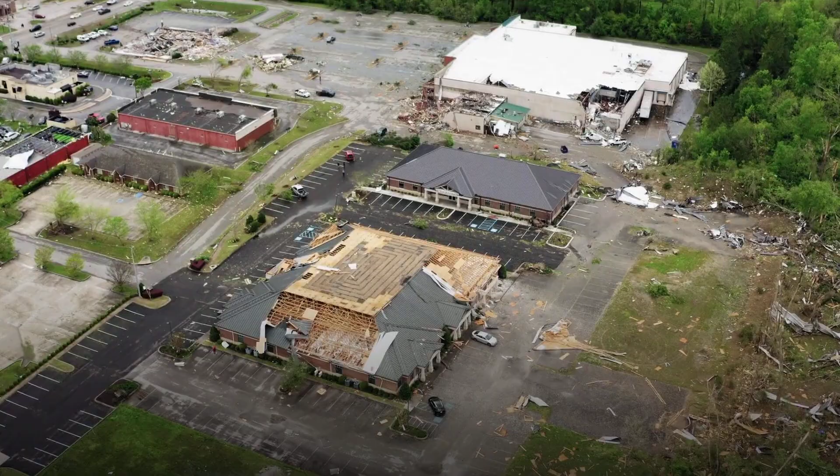A piercing crack, then a thunderous roar, ripped through the atrium. The fourth-floor walkway, suspended high above the lobby, shuddered. In a horrifying cascade, it tore free from its supports, plummeting onto the second-floor walkway below. For a moment, the world seemed to hold its breath, before the combined weight of both structures, laden with dozens of people, crashed to the concrete floor.

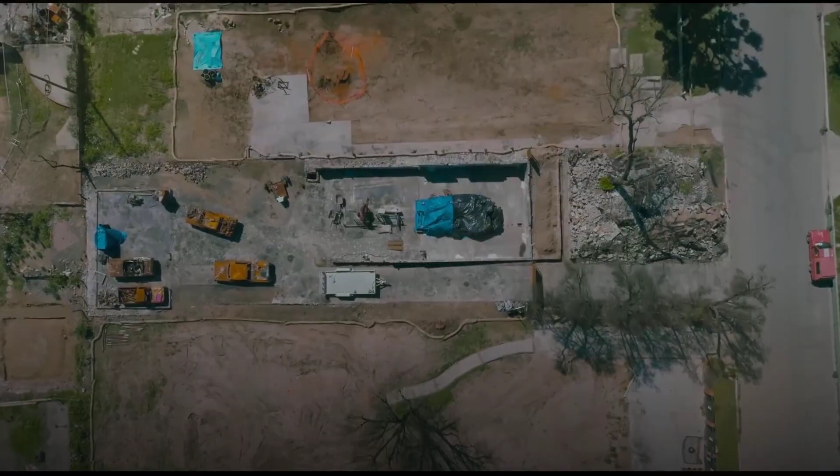The joyous sounds of the evening were instantly replaced by screams, dust, and the chilling silence of utter devastation. The immediate aftermath was a scene of unimaginable chaos and heroism. First responders, hotel staff, and even guests scrambled through the wreckage, searching for survivors amidst twisted steel, shattered glass, and broken concrete. The scale of the tragedy quickly became apparent.

What began as an evening of innocent revelry had transformed into a mass casualty event, etched forever into the city's memory. This was not merely an accident, it was a structural failure of profound magnitude, questioning the very foundations of modern engineering and design. By the time the dust settled and the rescue operations concluded, the true horror of the collapse was undeniable.

114 people had lost their lives, and over 200 were injured, many permanently. It remains one of the deadliest structural failures in American history, a stark reminder of the immense responsibility borne by engineers, architects, and builders. This wasn't a natural disaster, it was a catastrophe born from human design, a flaw that would unravel under intense scrutiny, exposing systemic issues in the engineering profession.

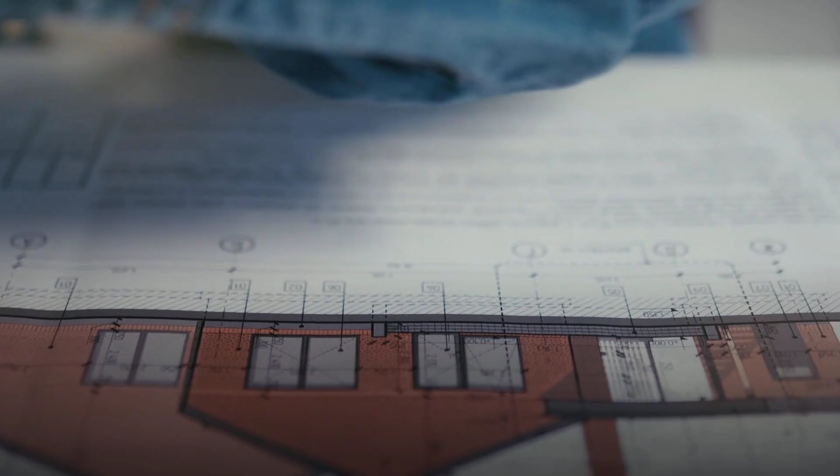How could such a catastrophe occur in a modern, seemingly robust structure? The question haunted a nation. For engineers and the public alike, understanding the why became paramount. The investigation would reveal not a dramatic structural collapse in the traditional sense, but a subtle yet catastrophic design modification, a change that seemed minor on paper, yet fundamentally altered the load paths and stress distribution within the walkway's suspension system. This was the smoking gun, a seemingly innocuous alteration that sealed the fate of over 100 innocent lives.

To understand the failure, we must first appreciate the original vision for the Hyatt Regency Kansas City. Completed in 1980, its signature feature was a vast, multi-story atrium, an architectural statement designed to impress. Spanning the atrium were 3 suspended walkways, connecting different wings of the hotel. These elegant structures were intended to be a dynamic part of the guest experience, offering panoramic views of the bustling space below. Their design was integral to the hotel's modern aesthetic, a symbol of its ambition and contemporary flair.

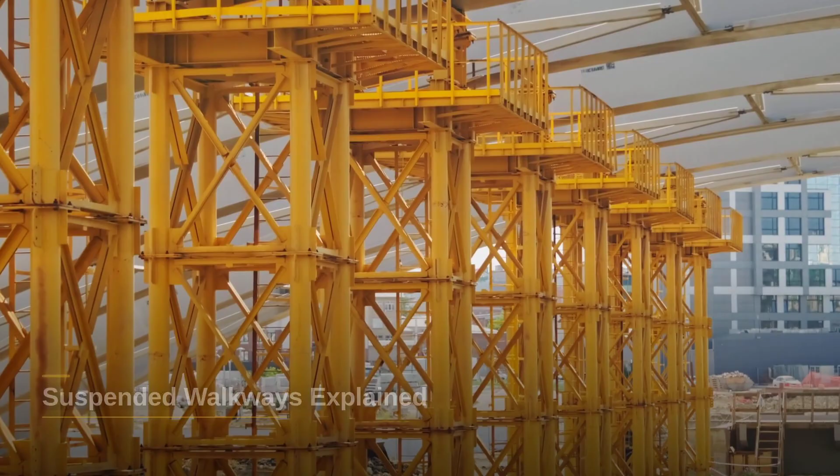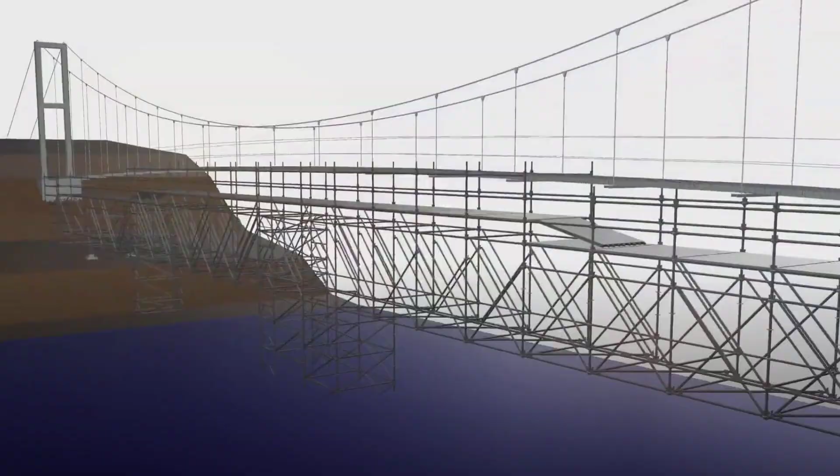The walkways were not supported from beneath, but dramatically hung from the ceiling structure above, creating an illusion of lightness. This suspension was achieved using long, threaded steel rods, often called tie rods or hanger rods, which passed down through the walkway's steel box beams. These box beams formed the primary structural element of the walkways, providing their strength and rigidity. The concept was innovative, aesthetically pleasing, and, in theory, structurally sound. The key was in the connection, how these rods met the beams.

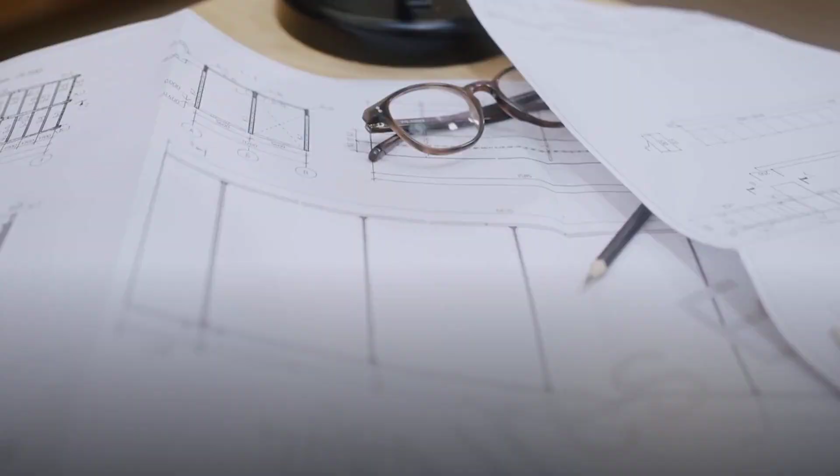In the initial design drawings, the intent was clear: a continuous tie rod would extend from the atrium ceiling, passing through the fourth floor box beam, and then continue downwards to support the second floor box beam. At each walkway level, a large nut would be threaded onto the rod, resting against a washer plate at the underside of the box beam. This single rod system was elegant, distributing the combined weight of both walkways, plus their occupants, directly up to the ceiling support. It was a straightforward and robust design, or so it seemed.

However, constructing this original design presented a practical challenge. Fabricating and erecting one exceptionally long, continuous tie rod that accurately passed through two separate box beams, aligning precisely, was difficult. It required extreme precision in manufacturing and assembly, along with careful coordination on site. This logistical hurdle, common in complex construction projects, often leads to field modifications.

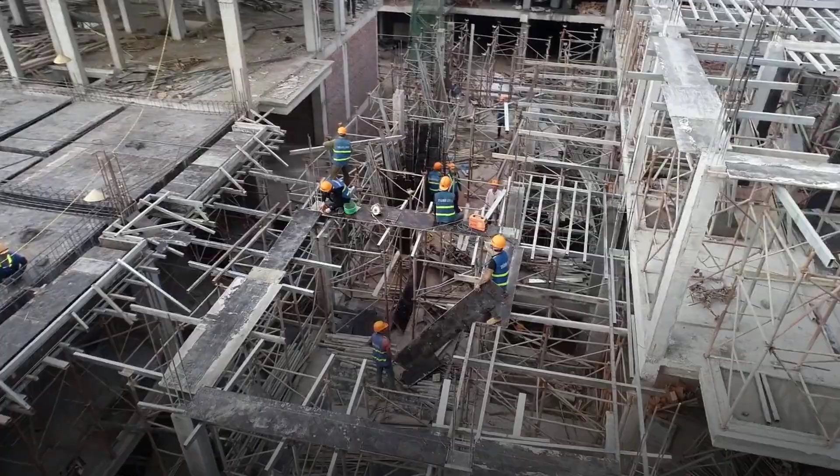And it was here, in the pursuit of ease and efficiency, that the seeds of disaster were sown, subtly changing the fundamental mechanics of the structure. To simplify construction, a critical design change was introduced by the steel fabricator and subsequently approved by the project's structural engineers.

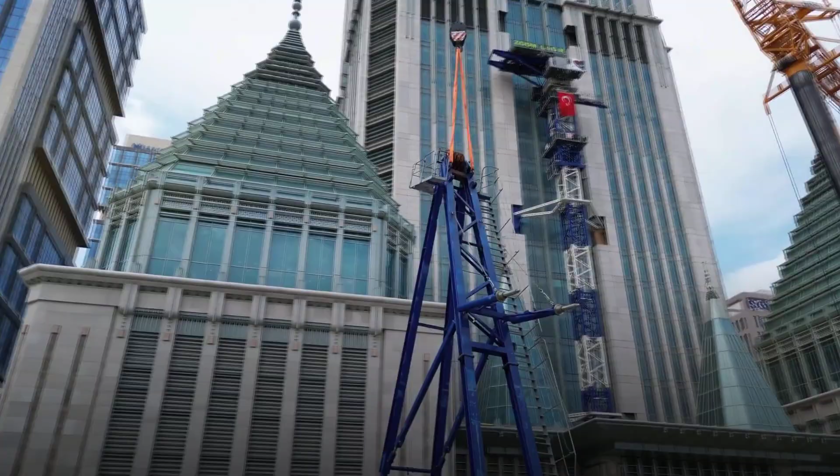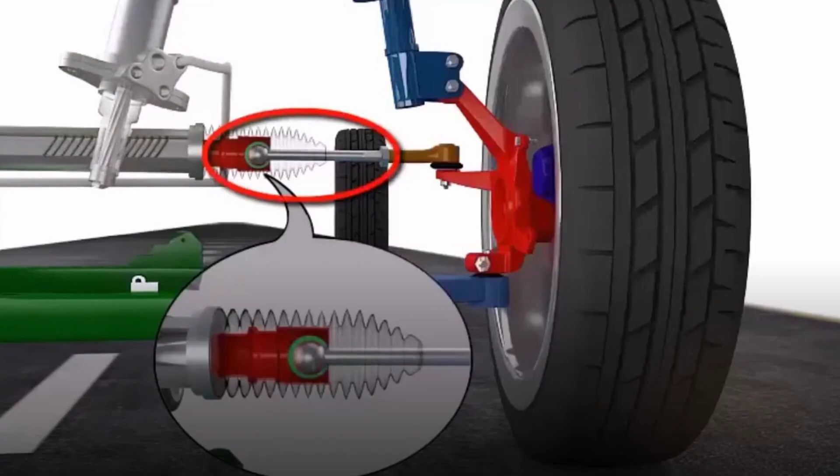Instead of a single continuous tie rod, two separate, shorter rods were used for each suspension point. One rod extended from the ceiling down to support the fourth-floor walkway. A second, independent rod then hung from the underside of the fourth-floor box beam, supporting the second-floor walkway. This seemingly minor alteration eliminated the need for a single, impossibly long rod.

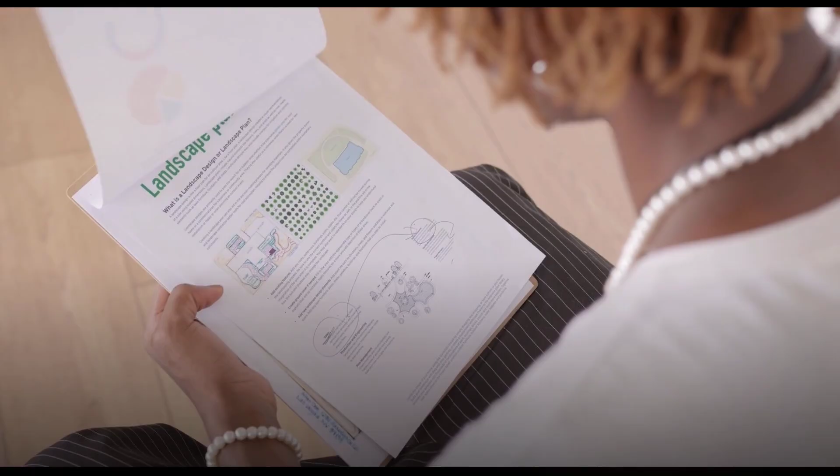On the surface, this two-rod system might appear functionally equivalent. However, its impact on the structural integrity was profound. In the original design, the fourth-floor box beam merely transferred the load from the second-floor walkway around its own connection point. With the modification, the fourth-floor box beam was now directly supporting the entire weight of the second-floor walkway, in addition to its own. The load path was fundamentally altered, creating a critical point of stress where none had been intended.

Let's zoom in on the specific connection point at the fourth-floor walkway. In the modified design, the lower tie rod, supporting the second-floor walkway, was no longer merely passing through the fourth-floor box beam. Instead, it was threaded into a nut that rested directly on a washer plate, which in turn sat on the underside of the fourth-floor box beam. This meant the box beam itself was now responsible for bearing the direct load of the walkway below, transmitted through this single connection point.

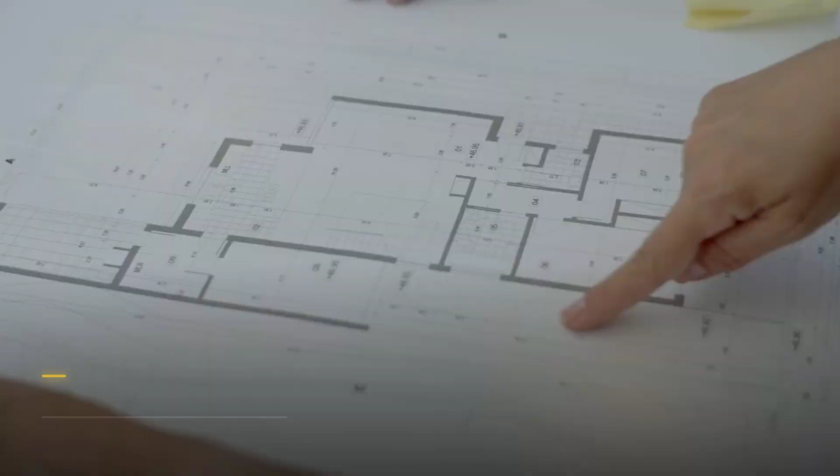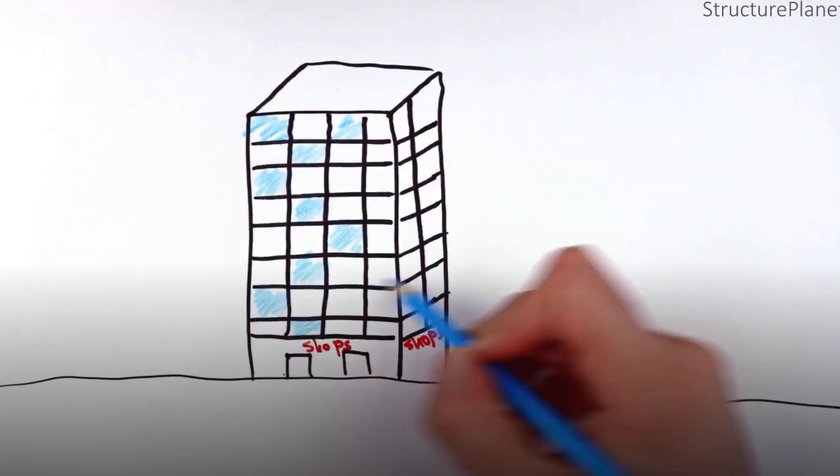Crucially, the original design had the load from the second-floor walkway bypassing the fourth-floor box beam, simply transferring it upwards. The modification effectively doubled the load on the connection at the fourth-floor box beam. The nuts holding the lower rods now had to support the full weight of the second-floor walkway, while simultaneously, the nuts holding the upper rods had to support the combined weight of both the fourth-floor walkway and the now hanging second-floor walkway. This was a monumental increase in stress at a critical juncture.

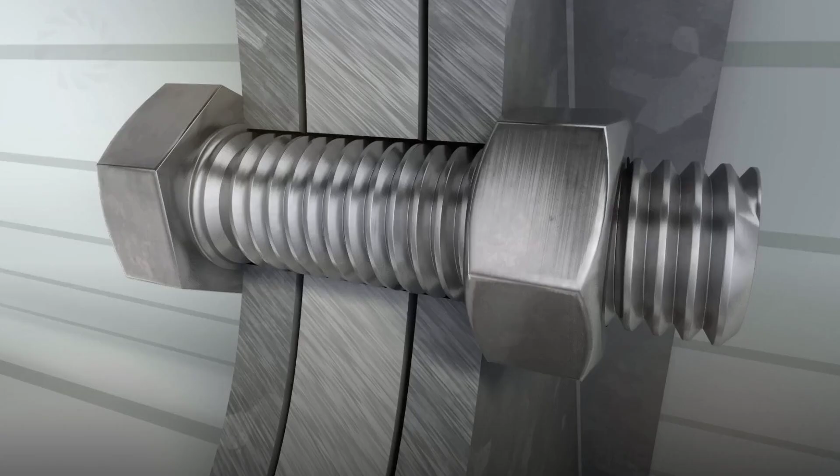The strength of this connection depended entirely on the capacity of the steel box beam and the small area around the nuts. The nuts themselves were designed to carry significant tension along the tie rod. However, when these nuts were threaded onto the upper section of the lower tie rod and held in place below the fourth-floor box beam, the entire force from the lower walkway was transmitted through this small connection. This force was far greater than the original design intended for that specific point, creating a punching shear scenario.

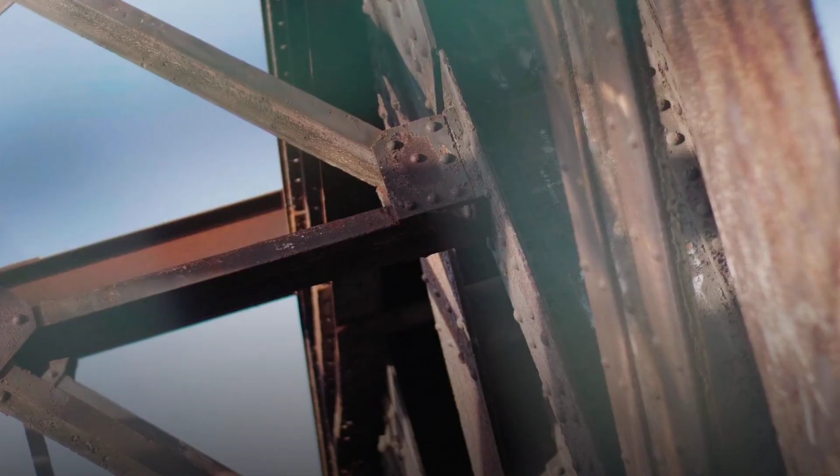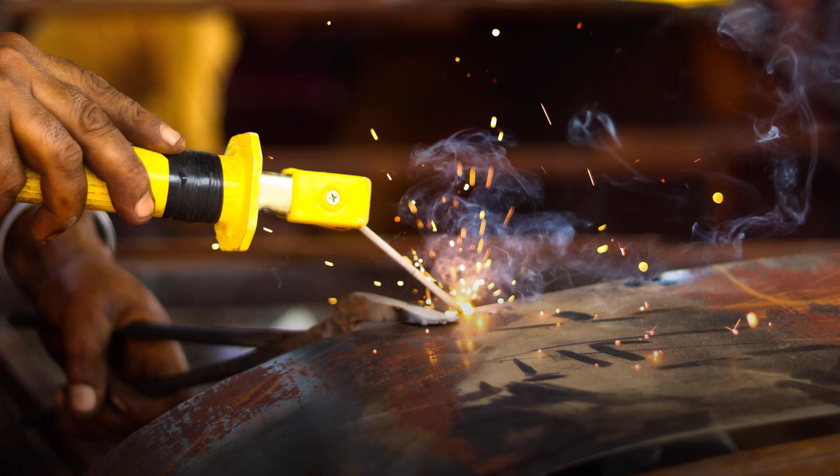Compounding the problem, the fourth-floor box beam was constructed from two steel channels welded together. The nuts holding the lower tie rods were designed to bear against the bottom flange of this box beam. However, the connection between the flange and the vertical web of the channel was a simple fillet weld. This weld was adequate for the original design, where the beam itself wasn't carrying the direct vertical load of a lower walkway. But under the modified design, this weld was placed under immense, direct tension and shear forces it was never designed to withstand.

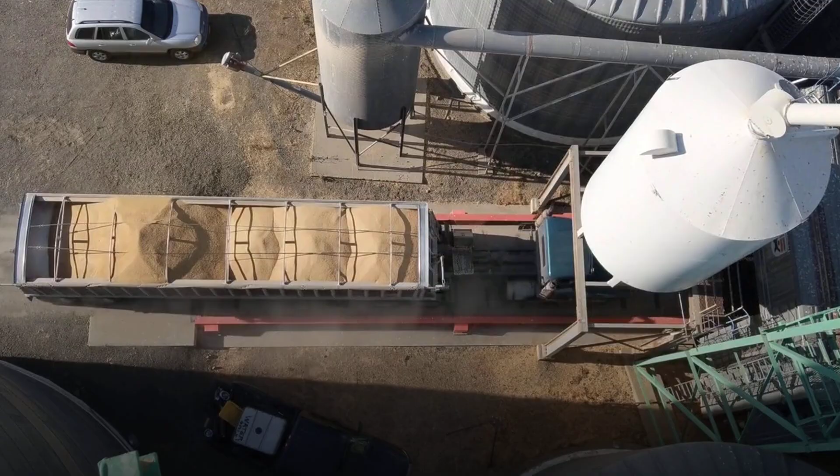As more people gathered on the walkways that fateful evening, the load incrementally increased. The connections, already critically overstressed by the design modification, approached their ultimate limit. The fourth-floor walkway, carrying not only its own weight and occupants but also the entire weight of the second-floor walkway and its occupants, reached a tipping point. The structural capacity of the critical weld and the steel around the nuts was simply insufficient to resist the immense tensile forces. Imagine the threaded nut, gripping the steel rod, trying to pull through the thin flange of the box beam. The metal around the nut, weakened by the inadequately welded connection, began to deform and tear.

Once one connection failed, the entire load instantly redistributed to the remaining connections, overloading them in turn. This cascading effect led to rapid, catastrophic failure across all support points for the fourth-floor walkway. It wasn't a slow sag, it was a sudden, violent ripping apart of metal under unbearable tension. The fourth-floor walkway, having lost its primary support, plunged downwards.

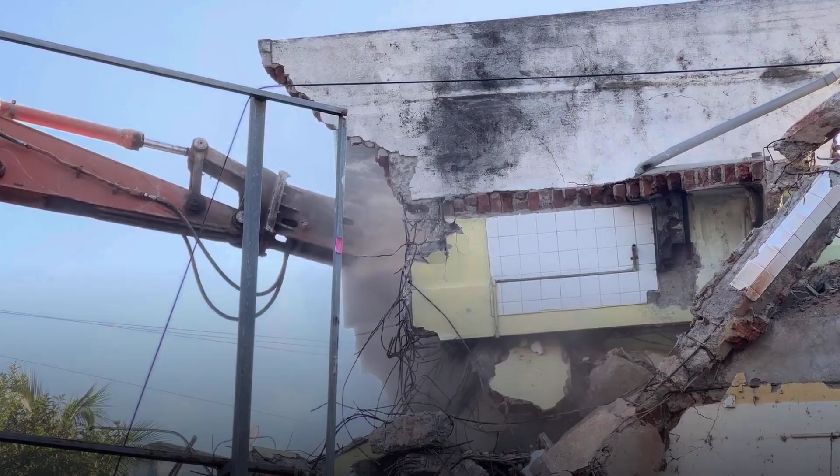Its descent was not halted, but instead, it impacted the second-floor walkway directly below. The force of this impact, combined with the additional weight of the collapsed structure, was overwhelming. The already heavily loaded support system for the second-floor walkway could not withstand this sudden, compounded dynamic load. In a terrible, almost simultaneous sequence, both walkways collapsed onto the ground floor, carrying with them scores of unsuspecting individuals.

The critical question remains, how could this fundamental design flaw, this fatal modification, go unnoticed and uncorrected? The change itself wasn't inherently complex, but its implications for structural mechanics were profound. The tragedy exposed a severe breakdown in communication and accountability between the structural engineers responsible for the overall design and the steel fabricators who proposed the easier construction method.

It highlighted a dangerous blind spot in the professional review process, a failure to scrutinize what appeared to be minor adjustments.

In the immediate aftermath of the collapse, the scene was one of overwhelming destruction. Emergency services were quickly overwhelmed, but the response from the community was immense. Doctors, nurses, and ordinary citizens converged on the hotel, forming human chains to help move debris and aid the injured. The focus was on rescue and recovery, sifting through the tangled mess of steel, concrete, and personal belongings. Amidst the heroism, a somber realization began to dawn: this was a disaster that demanded a thorough, uncompromising investigation.

Central to the investigation was the reconstruction of the walkway's original and modified designs. Investigators pored over blueprints, architectural drawings, and fabrication shop drawings. They discovered the stark difference between the initial design, which specified continuous hanger rods, and an as-built modification. This discrepancy immediately raised red flags. The focus narrowed to the connection points at the fourth-floor walkway, where the critical failure was suspected to have originated.

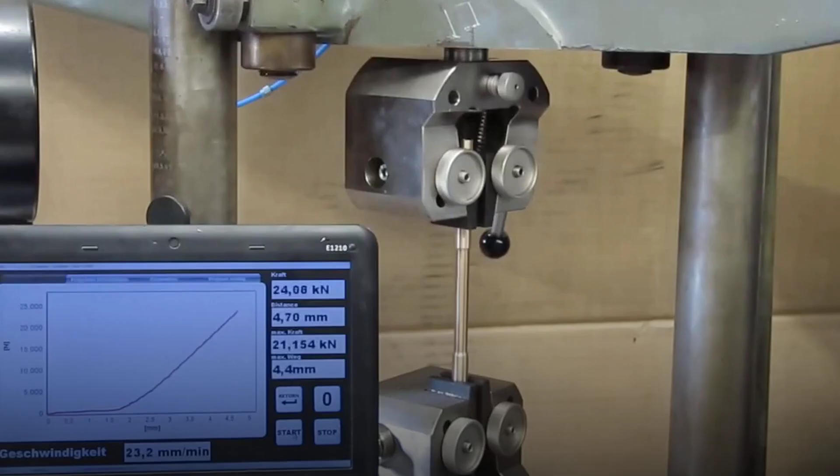Through extensive material testing and structural analysis, the investigators confirmed their suspicions. The fillet welds connecting the bottom flange of the fourth-floor box beam to its vertical web were indeed the primary failure point. Under the significantly increased load of the modified design, these welds had simply ripped apart, unable to bear the immense tension. This failure then initiated the complete collapse, as the box beam could no longer effectively support the lower tie rod.

With the technical cause identified, the investigation moved to pinpoint responsibility. It centered on the structural engineering firm, Jack D. Gillum and Associates, and the steel fabricator, Havens Steel Company. The fabricator had proposed the design change, citing ease of construction. Crucially, the structural engineers, despite reviewing and approving the modification, failed to adequately analyze the profound impact it would have on the load-bearing capacity of the critical connections. This oversight was deemed a fundamental breach of their professional duty.

The investigation concluded that the structural engineers were grossly negligent. Their approval of the modified design without proper review constituted professional misconduct. They had a professional and ethical obligation to ensure the safety and structural integrity of the building, an obligation they failed to uphold. This wasn't merely a clerical error, it was a fundamental oversight in professional judgment that led directly to a catastrophic loss of life. The findings sent shockwaves through the engineering community, forcing a painful examination of self-regulation and professional standards.

Beyond the technical findings and legal repercussions, the human cost of the Hyatt Regency collapse was immeasurable. Families were shattered, lives forever altered. Survivors grappled with physical disabilities and deep psychological trauma. The tragedy served as a brutal, visceral reminder that engineering is not merely about calculations and blueprints, it is about protecting human lives. Every rivet, every weld, every structural decision carries the weight of potential consequence, a burden that demands the utmost diligence and ethical integrity.

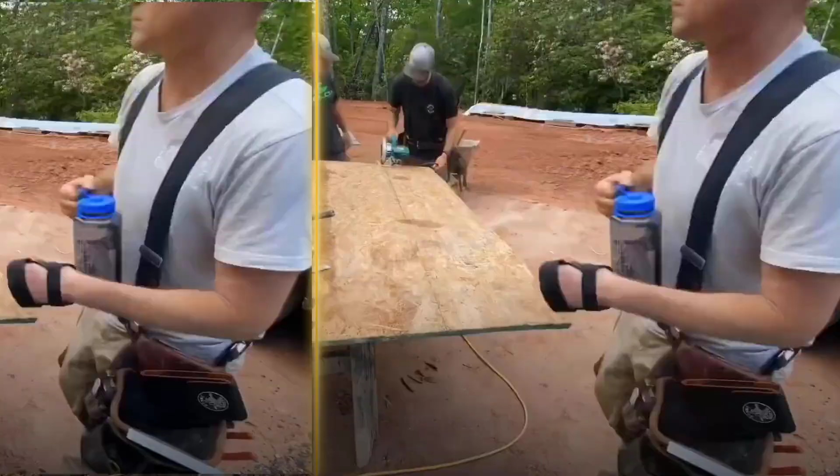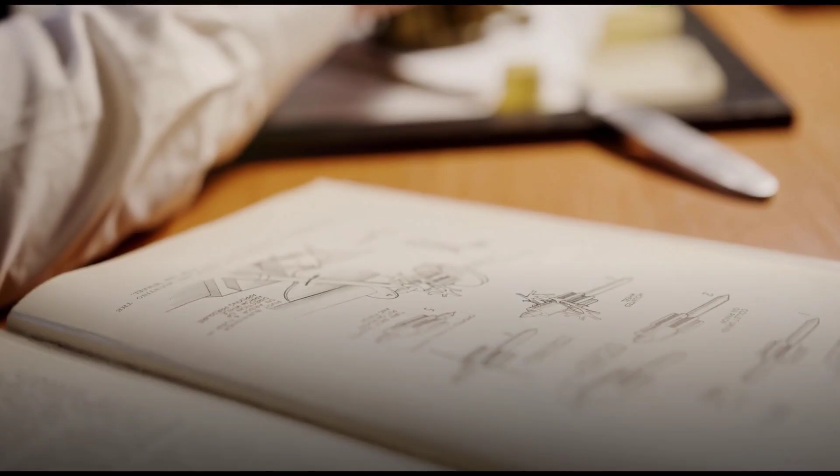In response to the tragedy, building codes and engineering standards were rigorously reviewed and significantly strengthened across the United States. New requirements were implemented, particularly regarding the review and approval of design changes, mandating that such modifications receive the same level of scrutiny as the original design. The disaster prompted a greater emphasis on detailing connections and ensuring that the entire load path within a structure is clearly understood and verified by a licensed professional engineer.

The collapse highlighted the critical necessity of independent peer review, especially for complex or innovative designs. While not always mandated, the practice of having an independent engineering firm review critical design elements became much more prevalent. This added layer of scrutiny aims to catch potential errors, misunderstandings, or overlooked details before they become catastrophic realities.

It reinforces the idea that no single engineer or firm is infallible, and multiple eyes can often prevent disastrous oversights.

The individuals directly involved in the design and approval of the flawed modification faced severe professional consequences. The licenses of the responsible engineers were revoked or suspended, a stark warning to the profession. This unprecedented level of accountability solidified the principle that engineers are personally and professionally liable for their work. It underscored that engineering is not just a technical craft, but a licensed profession with profound legal and ethical obligations to public safety.

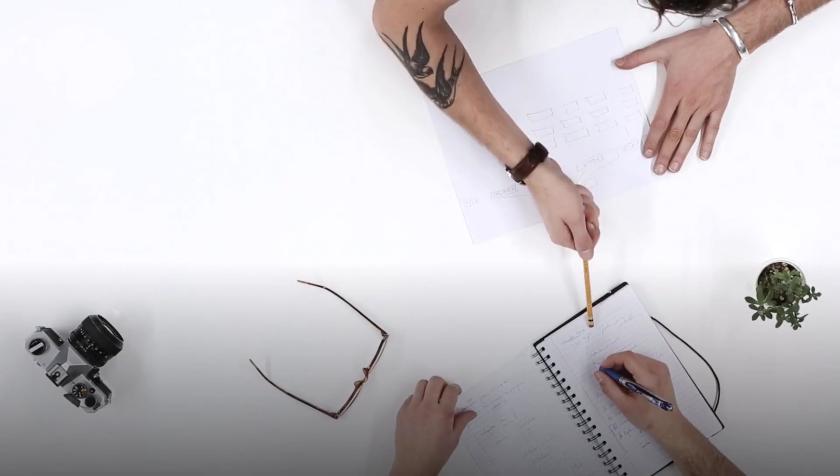One of the most significant lessons learned from the Hyatt Regency disaster was the critical importance of clear, unambiguous communication throughout the design and construction process. Any proposed change, no matter how minor it appears, must be thoroughly documented, communicated to all relevant parties, and subjected to a comprehensive structural analysis by a qualified engineer. Assumptions and verbal approvals proved to be deadly. Precise, written communication became an enforced standard to prevent similar misunderstandings.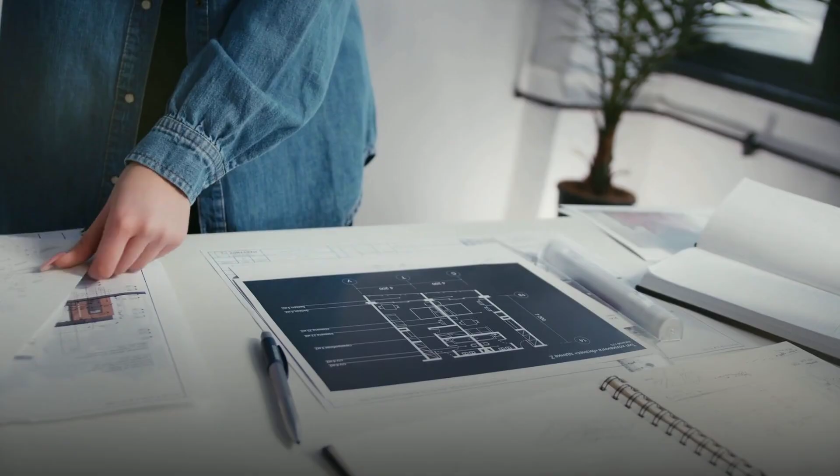Ultimately, the legacy of the Hyatt Regency Walkway collapse is an ethical one. It stands as a stark reminder that the primary duty of an engineer is to protect the public's safety and welfare. This duty transcends commercial pressures, project deadlines, and minor design conveniences. It demands unwavering vigilance, integrity, and a profound understanding that every decision carries the potential for life or death. The collapse compels every engineer to ask, have I done everything within my power to ensure this structure is safe?

Engineers are granted a sacred trust by society, the authority to design and construct the built environment that profoundly impacts human lives. With this authority comes immense responsibility. The Hyatt Regency disaster profoundly changed how engineers perceived their role, pushing the profession towards a culture of greater transparency, stricter accountability, and a perpetual dedication to safety above all else. It is a lesson etched in steel and concrete, remembered in the solemn silence of a reconstructed atrium.

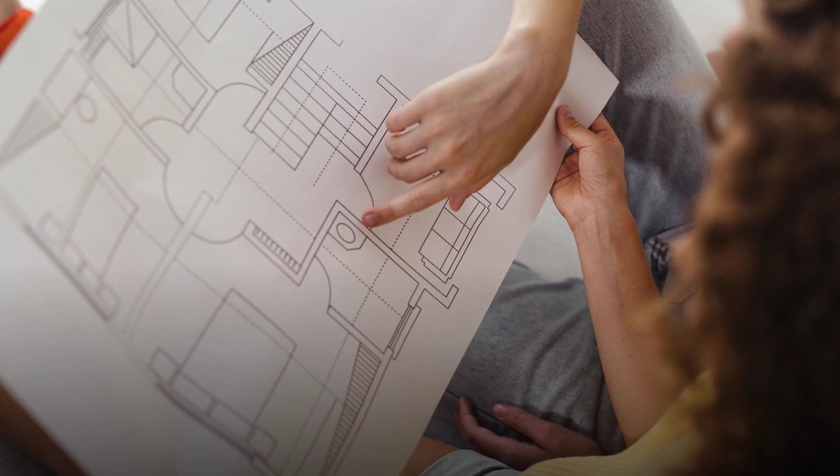The story of the Hyatt Regency collapse is a complex narrative, not just of structural mechanics, but of human factors, communication failures, and ethical lapses. It teaches us that engineering excellence extends beyond mere calculations to encompass a holistic understanding of risk, responsibility, and the profound impact of every decision. It's a testament to the fact that even seemingly minor changes, when misunderstood or inadequately reviewed, can have the most catastrophic consequences.

Decades later, the physical wounds of the Hyatt Regency collapse have healed, and the hotel has been renovated, its atrium now devoid of suspended walkways. But the memory of that July evening remains a haunting shadow over the engineering profession. It serves as an enduring cautionary tale, a permanent fixture in the curriculum of aspiring engineers, reminding them that their craft is not just about building structures, but about safeguarding lives, and that vigilance is the ultimate cornerstone of their profession.

In an era of increasingly complex and ambitious architectural designs, the lessons from Kansas City are more relevant than ever. The drive for innovation must always be tempered by rigorous adherence to safety standards, meticulous design review, and an unshakable commitment to ethical practice. The tragedy underscores that every component, every connection, no matter how small, plays a vital role in the overall integrity of a structure. It is a constant call to professional excellence and a profound respect for the potential impact of engineering on human existence.

The 114 lives lost on that summer night in 1981 were not in vain. Their sacrifice forged a path towards a safer future, catalyzing fundamental changes in engineering practice, ethics, and accountability. It taught us that the pursuit of innovation must always be balanced by an unwavering commitment to safety. For every engineer, the Hyatt Regency collapse is a solemn vow, whispered in the blueprints and hummed in the steel. Never again will a design flaw, preventable by diligence and ethics, claim so many innocent lives.